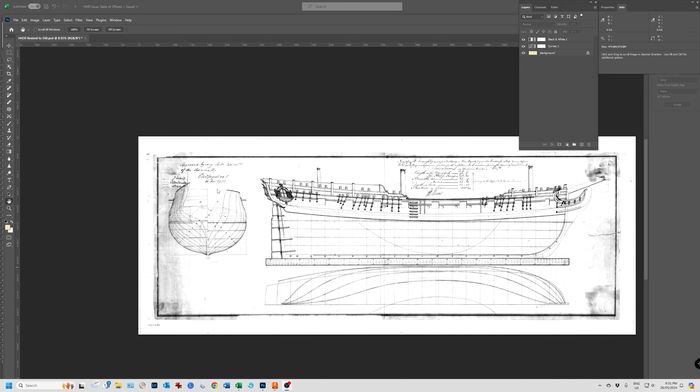Just going to show you, John, what it is I'm doing. I've got these 48 scale plans for the HMS, let's see, HMS Atalanta. I'd never think of the Atalanta. It's a Swan class frigate. So these are 48 scale. Cost a little bit of money a couple of years ago.

So these are the framing plans. These lines here, these are from looking from the stern forward. And these lines here are looking from the bow looking back. So each one of these is equivalent to this line in cross section.

So what I'm doing is I've laid a grid. I've done a printout of these full size in 48 scale. I've just got a grid at 20 millimeters up and down, left and right, so that I can locate particular points on these curves. What I'm doing then is I'm making up a table of offsets. So for a particular frame, at 0, 20, 40, 60, 80, 100, all the way through up here,

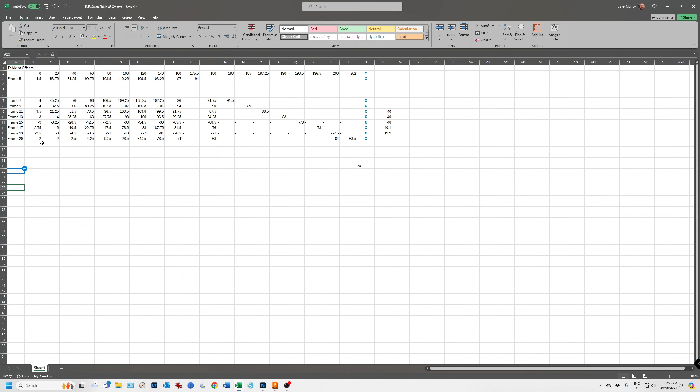I've got various offsets in millimeters. These plans, the table of offsets originally would have been in feet and inches. I haven't got access to that table of offsets, so I'm having to measure it up myself. So I'm gradually measuring each frame with a vernier, and it gets a bit tiresome, but yeah, what can you do if you want to mess around? And that's what I'm doing. I'm trying to learn some of these programs.

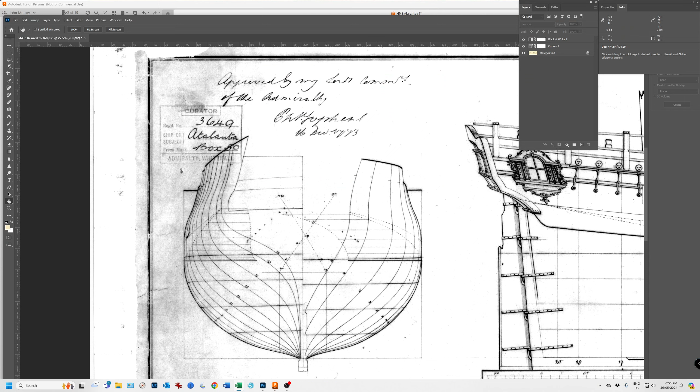So by doing that, I then end up with this table of offsets, and then I'm using these. This is the offset in the X dimension. This is the offset in the Y dimension for each frame. I'm going through putting in one frame at a time. So I'm going to drag this window off screen so that I can see it off screen. Then I'm going to bring up Fusion.

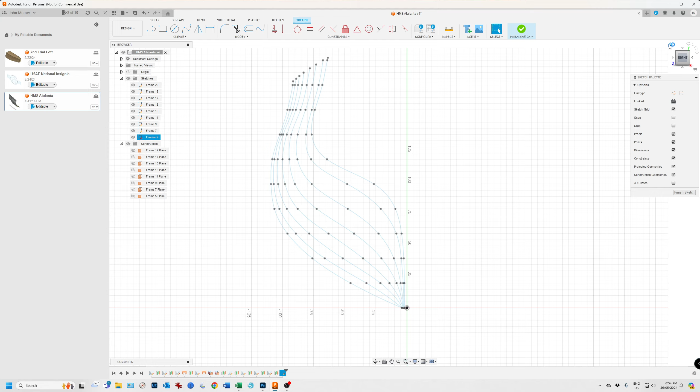So currently I've got these frames, each one of these points there is equivalent to the plan that I've got. So what I'm going to do, I've got various frames. If I turn it around, it gives us an idea of what's going on. Come to the front. Oh yeah, from the right hand side. I'll look back. I'll turn off the other frame so I don't get confused as to what I'm doing.

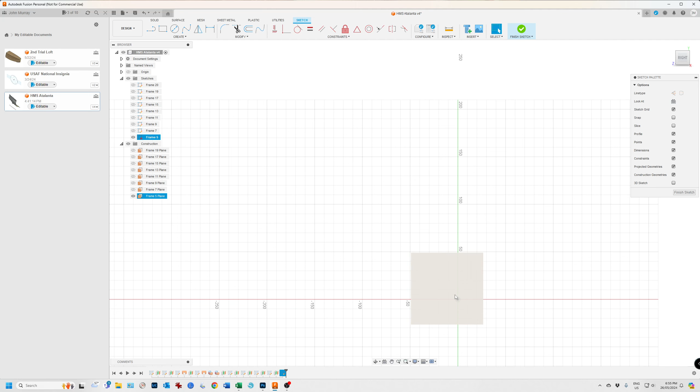Turn on this particular origin, and then what I'm going to do is start creating some of these points. So I'll create a point, and I'll start it at 0. Enter. And then referring to the table of offsets, the first frame is at minus 4.5 in the X, which is over here. So I hit M, select what I'm going to move, translate. So the X is minus 4.5 and the Y distance is 0.

I'm going to create a copy of that origin. So I'm making a copy of that particular point to start with from the origin. So all of my measurements in future are going to be referenced to there, and that lines up then with the table of offsets. So click OK. I've created that point. I'm going to turn that plane off just so it's not in the way. Now I'm going to have a look at the next one.

Hit M, move, create a copy, do a translate, then create a copy. I'll get tripped up over that. The next one is minus 53.75, and that's at a Y offset of 20 millimeters. So that's got these 2 points. Now the next one, M.

I seem to remember in AutoCAD Release 12 3D many years ago, back in the 90s when I was doing it, the most used commands would come up, and I'm using this one continuously, so I don't understand why it doesn't default to this. Could just be a limitation of the program, more than likely is, or I just haven't sorted out the preferences yet. So this one should be 40 up.

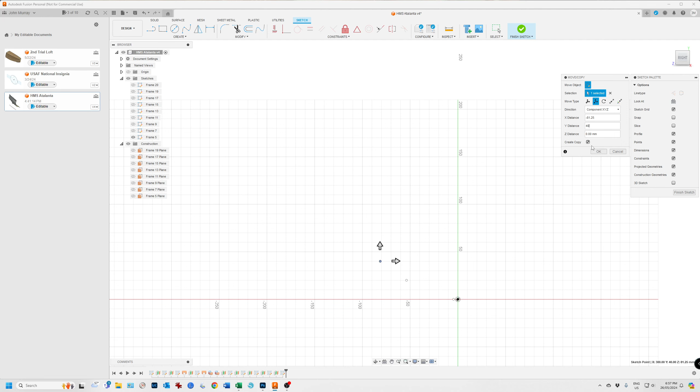Create a copy. So there we go, that one there. M there. Translate, create a copy. Next one is minus 99.75, and that's at 60. This is quite a long-winded way of doing it. There's probably a way to import these numbers as a sheet and create the splines automatically. As it is, I know nothing about that right now. So minus 108.5.

So the good thing is learning this point command enabled me to get these points, because I want to use the spline command up here, but I need certain locations to be nailed, and the only way I could figure that was using the point command. So if it's correct, probably not, but this is the way I'm doing it so far. So there's another one made.

So the next one, M up, translate, create a copy, 120 mil up, referring to my table of offsets, is minus 109.5. So you can see this is where we're going to be joining with a spline. Next one is 140. Back to the table of offsets, minus 103.25.

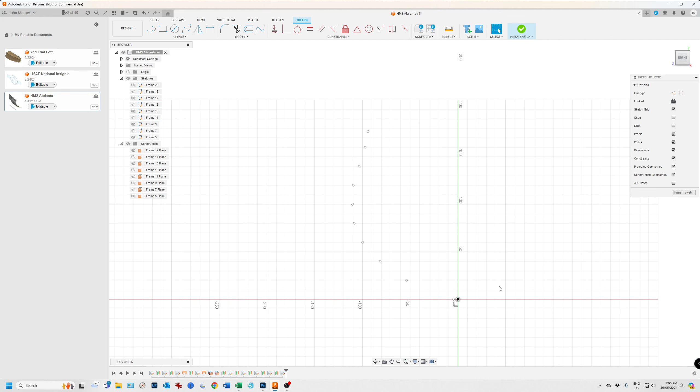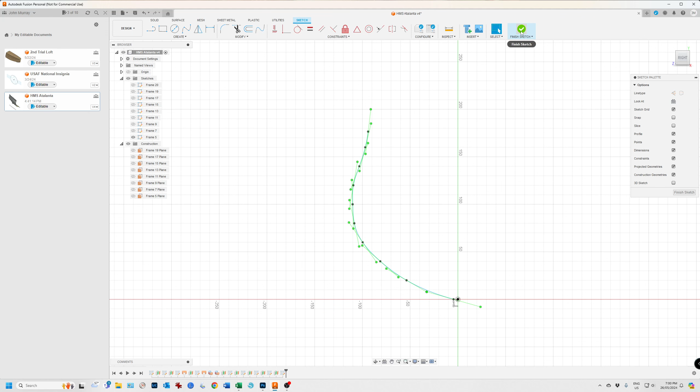So that one, all of those points are complete. So now I'll join them with a spline. As I say, I'm sure there's much quicker ways of doing this, and probably better ways, more efficient as well. I'll now finish the sketch. So if I turn on the other frames, that's how it looks, back through to front, coming forward.

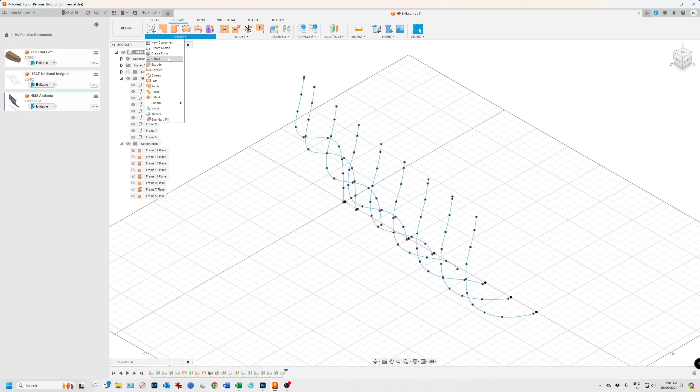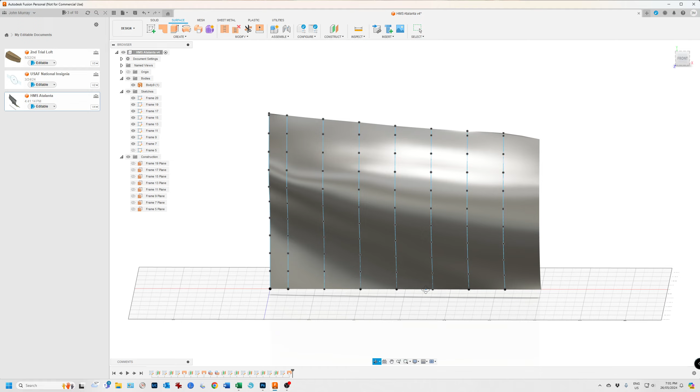What I might do now, let's see, rotate. I'm in surface, I'll do a loft. Do an orbit. And there's part of the hull looking from the rear. We're almost at the mid-section. There's a few more sections to do.

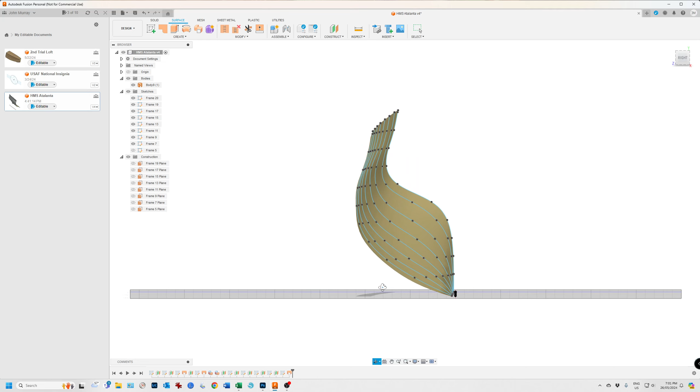But I think it's pretty good for someone who only started this shit, what is it, last week I think? About 7 days ago, so... Fusion's not as intuitive as I was hoping it'd be, but yeah, it's what it is.

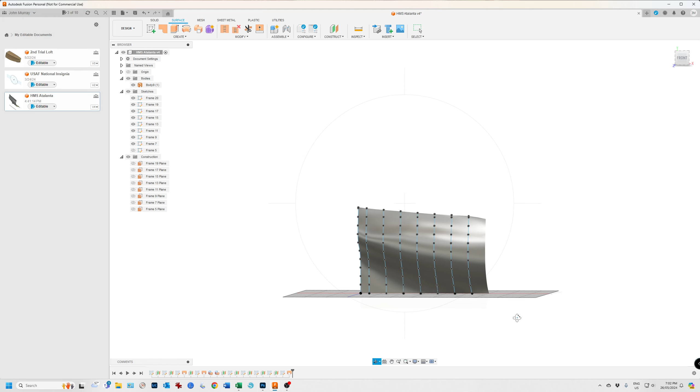So what I'll be doing is I'll zoom out a bit and I'll keep bringing frames forward up until around here, and then we should have a fully developed hull. I just thought you'd like to see what I was doing, John. But yeah, that point command, it's quite good.